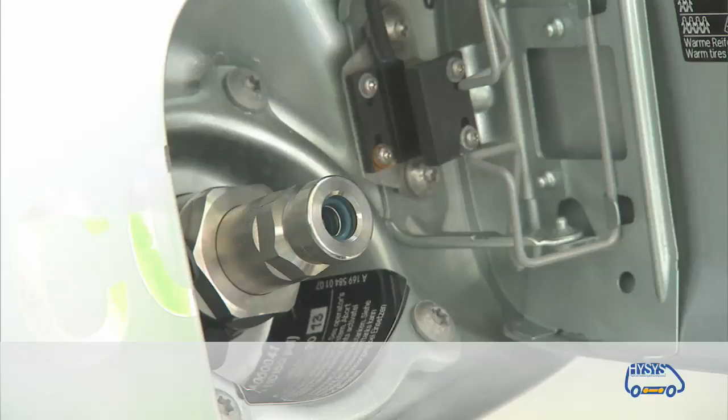The range of fuel cell vehicles is rather high in comparison to other electrified vehicles, and the fueling time is short. Additionally, hydrogen technology and fuel cell drivetrains contribute to the climate and energy policy of the European Commission.

The discussion of transportation in the future is marked by five key factors. First, the reduction of greenhouse gas emissions. Second, energy security. Third, increasing energy efficiency. Fourth, improvement of the life of the inhabitants, and the last point, competitiveness of the European industry.

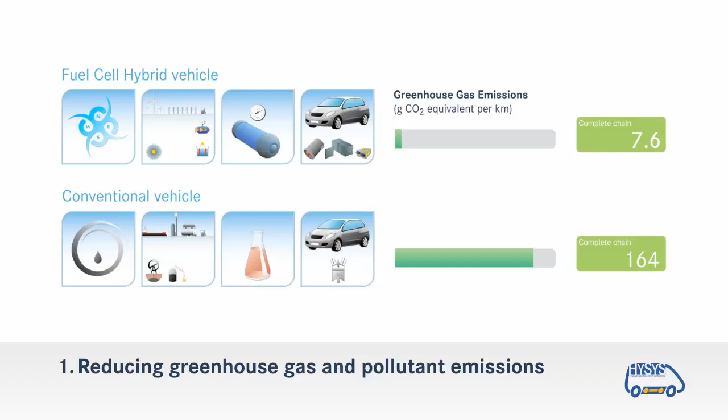As hydrogen can be produced from a variety of energy sources, it contributes to a significant reduction of CO2 emissions because it can be produced by renewable energies. Additionally, the large primary energy sources for hydrogen production contribute to energy security, because hydrogen can be produced everywhere in the world and is no longer dependent on regionally focused supplies like crude oil.

The high efficiency of the fuel cell powertrain contributes to a significant reduction of energy consumption for the transportation sector. Not to forget the low noise emissions, which contribute to an improvement of the life of the inhabitants. And lastly, European industry and academia are already in a very good position in fuel cell and hydrogen technology. Therefore, fuel cell technology and hydrogen can contribute to higher competitiveness of the European industry.

HySYS is a research and development project funded by the European Commission. Partners of the HySYS project come from the automotive industry, the supplier industry, and academia. The goal is to improve system components and subsystems for fuel cell and hybrid vehicles.

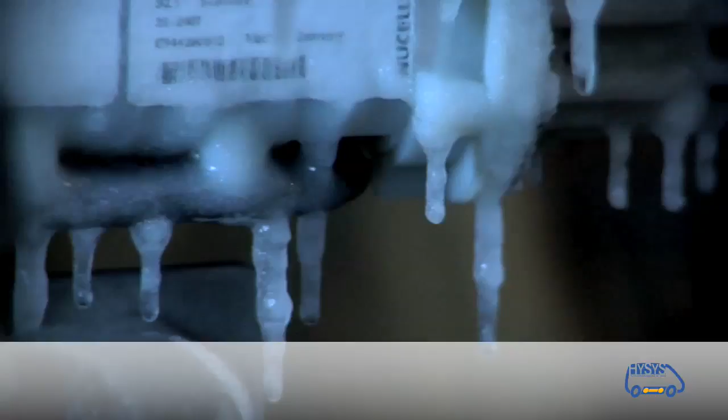These components can also be used for other electrified vehicles, like battery vehicles and plug-in hybrid vehicles. Once the components are developed, they will be integrated into validator vehicles in order to test the entire system.

HySYS is a joint project of 28 partners from 9 European countries. The project started in December 2005 and will end in November 2010. It is coordinated by Daimler and has a budget of 22.7 million euros, of which 11.2 million euros are funded by the European Commission.

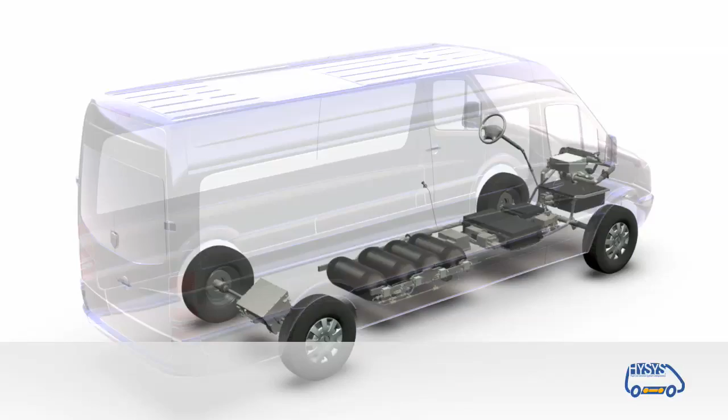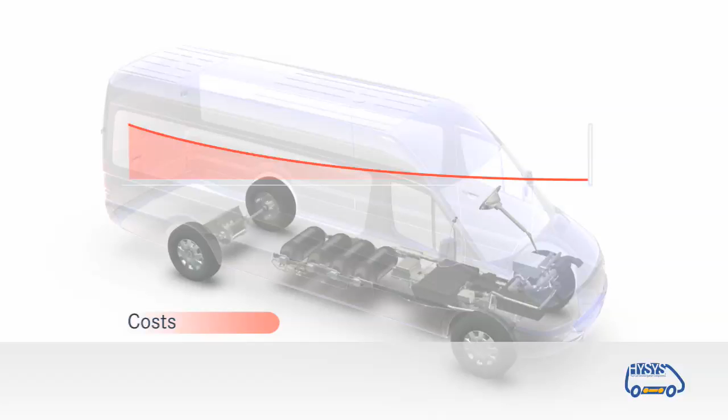The main objective of the HySYS project is to develop system components for fuel cell drivetrains and hybrid electric drivetrains. On one side, we work on fuel cell system components, on the other hand, on electric drive components. We focus on the most important fuel cell and electric drivetrain components, which have the highest potential for cost reduction and mass production. The approach is to reduce complexity and use innovative approaches.

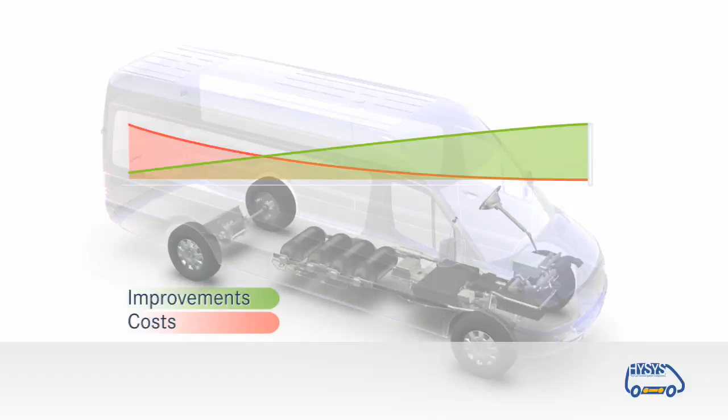This is done by improving fuel cell technology and electric drive technology in respect of functionality, reliability and cost. The optimization of system architecture and energy management contributes to a reduction of energy consumption and an increase of power density.

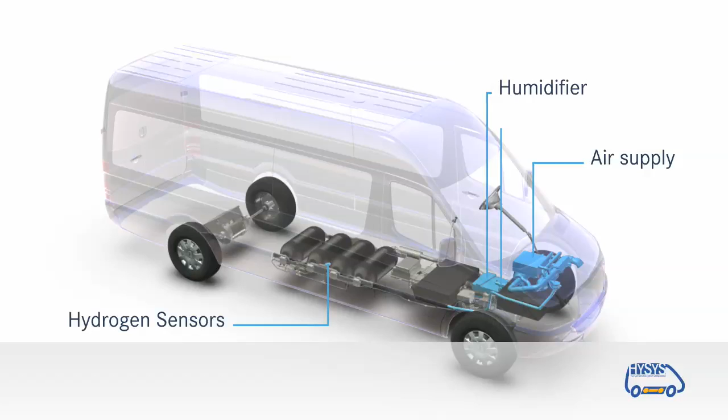On the fuel cell side, we focus on four components: the air supply, a novel humidification system, a new hydrogen sensor concept, and an innovative hydrogen supply line including hydrogen pump and metering. On the electric drive system side, we work on all important electrical components: the electric motor, the power electronics, and the battery.

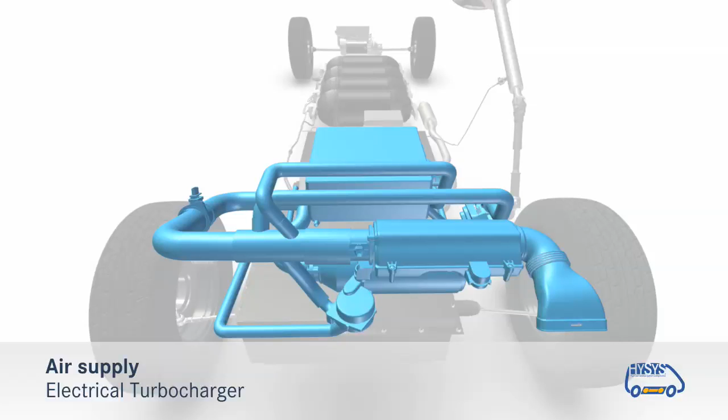When we look at the air supply system, the key component is an electrical turbocharger with very high efficiency. However, the costs for this advanced air supply system are relatively low, as are its volume and weight. In addition, the turbocharger has a high dynamic response and produces very low noise during operation.

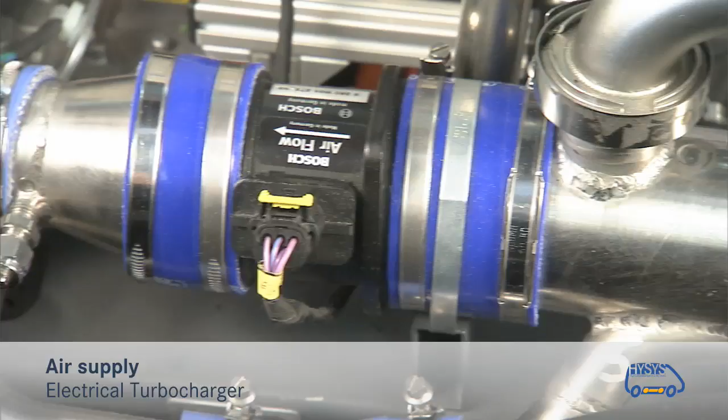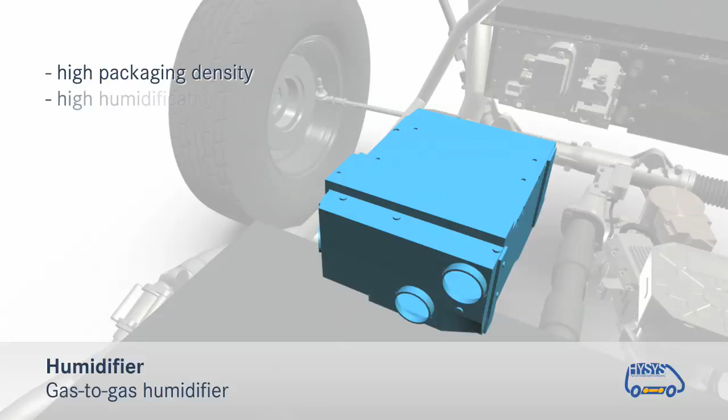The humidification system is based on a gas-to-gas humidifier with a high packaging density. At the same time, we have high humidification efficiency and low degradation tendency, although we are using low-cost materials and an easy production technology.

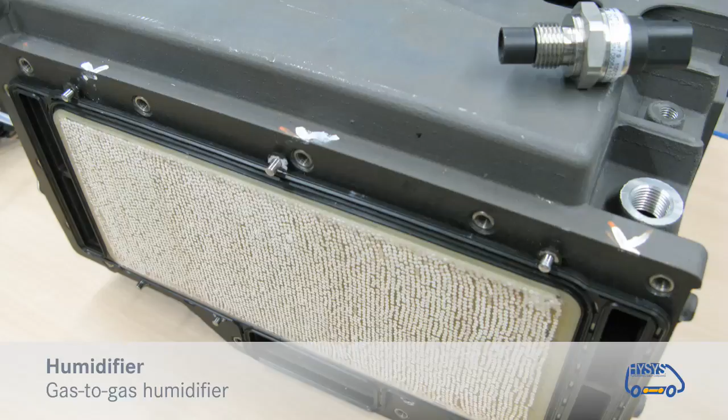The new hydrogen sensor concept uses palladium nanostructures. The results are low cost, volume and weight. The sensors have a very fast response and no calibration is needed anymore. The concept assures high gas selectivity and an integrated design.

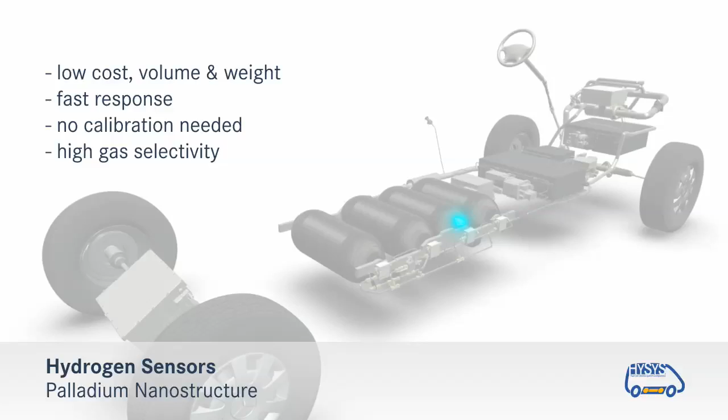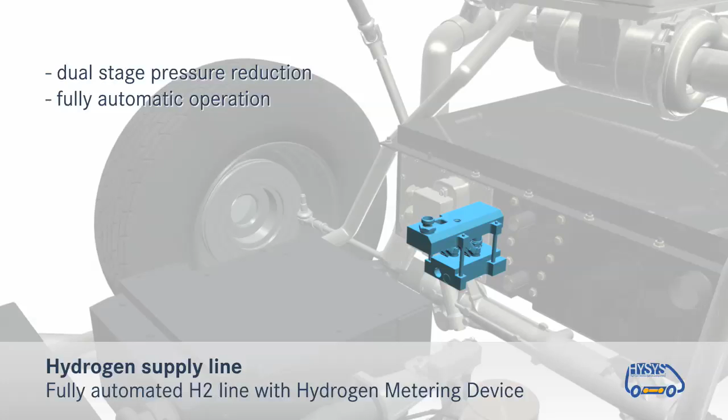In the vehicle, we have integrated a fully automated hydrogen line, including an innovative hydrogen metering. It allows for dual-stage pressure reduction and fully automatic operation. Furthermore, the fuel cell stack pressure can be regulated more easily. A failure recovery supports the system's safety, and last but not least, the overall lifetime of the fuel cell system has been improved.

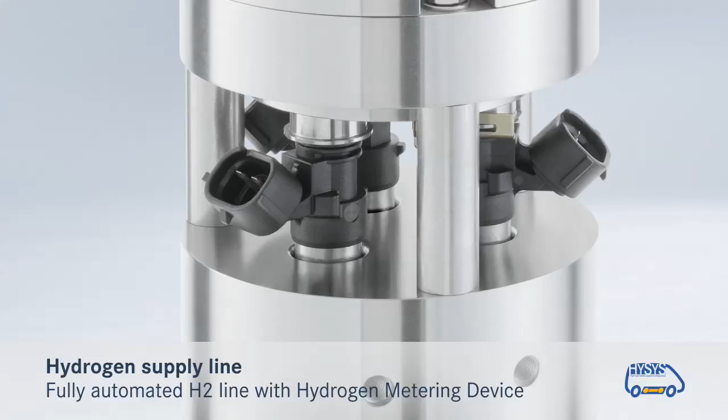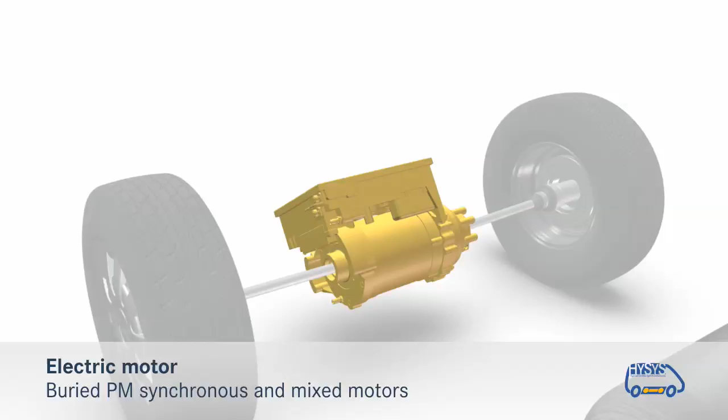When we look at the electrical motor, we decided to go for buried PM synchronous and mixed motors that have higher specific torque power efficiency.

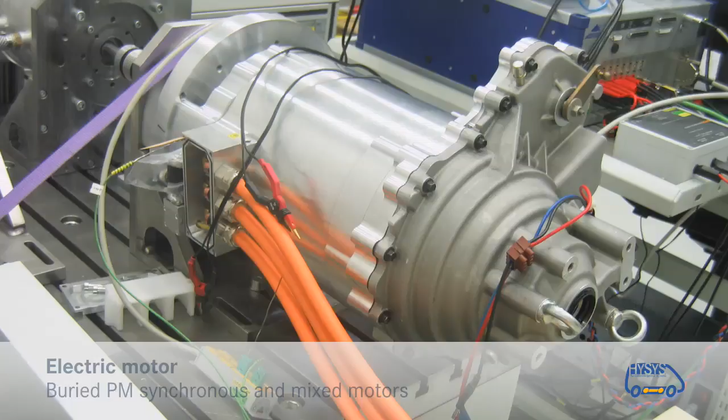Regarding power electronics, we focused on a modular solution with high power density. This could be achieved by better integration of these components and a higher cooling temperature of up to 90 degrees Celsius.

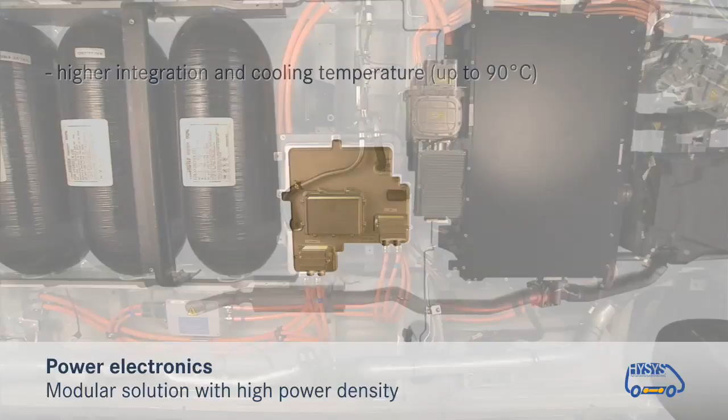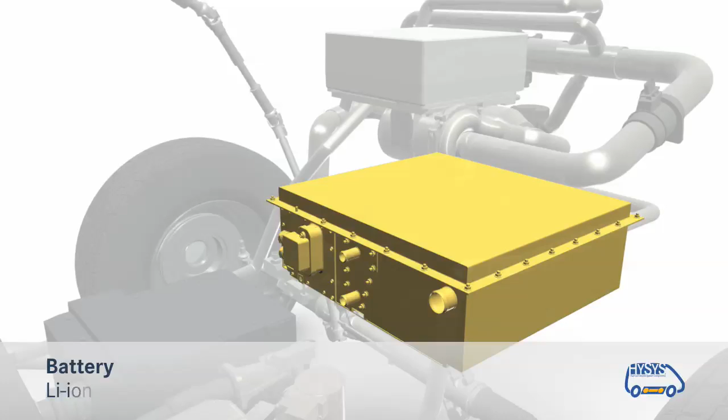The innovative lithium-ion battery is a key component for the electric drive system. The battery has a specific power of 2 kilowatts per kilogram and a specific energy of 63 watt-hours per kilogram. The efficiency reaches up to 95% with a lifetime of about 15 years.

In addition to the development of the components themselves, we are working on standardization of these components too. At the same time, we are looking for synergies between fuel cell and hybrid vehicles. Safety is another very important aspect, both for hydrogen and electric safety. Not to forget the optimization of control strategies and energy management, which lead to a significant reduction of energy consumption.

HySYS can pave the way towards commercialization of fuel cell and electric drive systems. The availability of low-cost components is important to be able to produce such vehicles for the mass market. Close cooperation between the supplier and automotive industry is the key for this, and HySYS is an example of how this cooperation can be done.